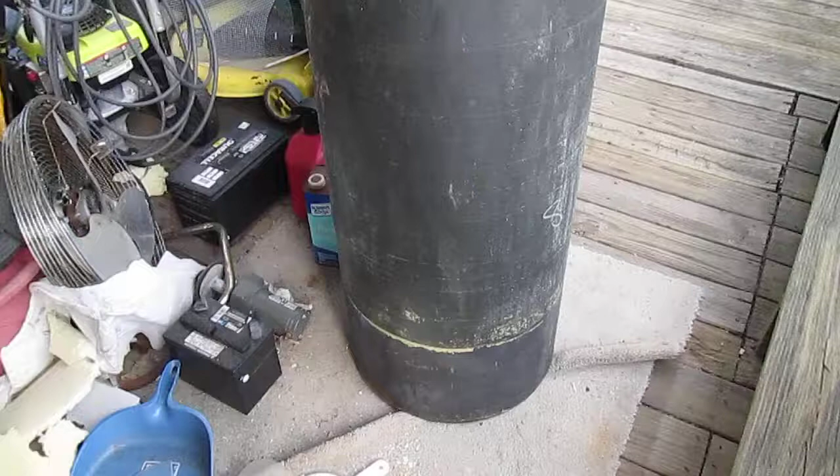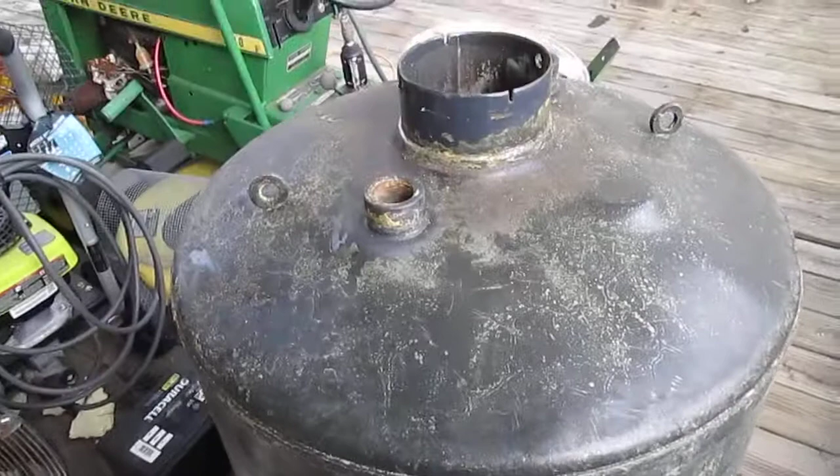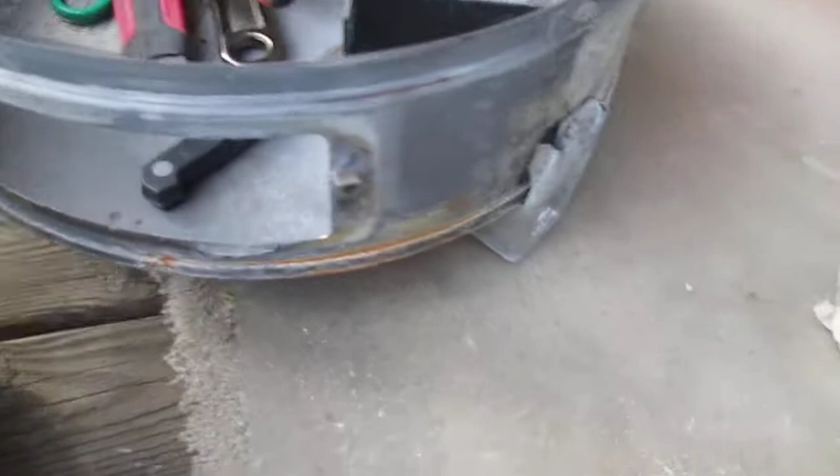Okay, today I am going to start attempting to make my own waste oil burner. I got this tank here and it's a 40-gallon. My only issue is that this stupid thing that goes the pipe all the way down, that's my only issue. Other than that, everything else looks really good. I also have the base here, which is awesome. It has 3 legs and it sits right on top of it, so I can raise that off the ground.

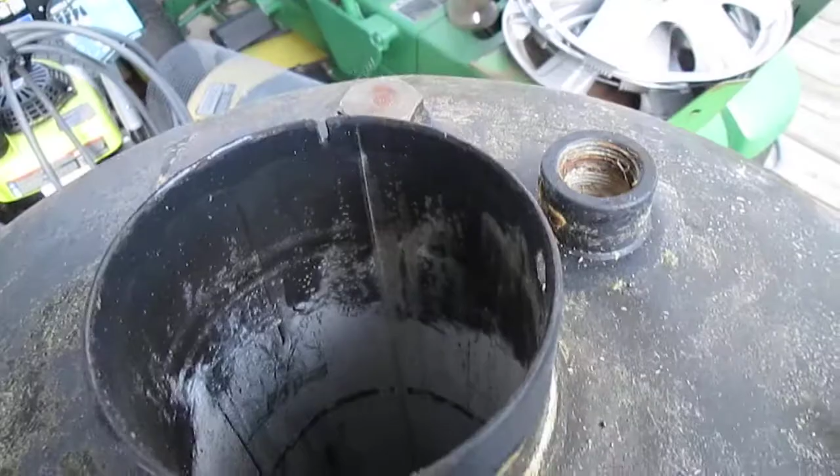I'm planning to put the door over here somewhere because that's where my feeding tube's gonna go in from the side, and then all these holes right here up here where the inlet and the outlet from the original, I have to plug that up. Same thing with the side here. I guess that's the plug that they use to plug in with, but other than that, there's nothing else on there at all. I'm going to show you the drawings.

I'm going to go inside a little bit because it's kind of windy out. And here's my drawing. Okay. Sorry, the camera's a little shaky, but this is just a start, and this is the plan.

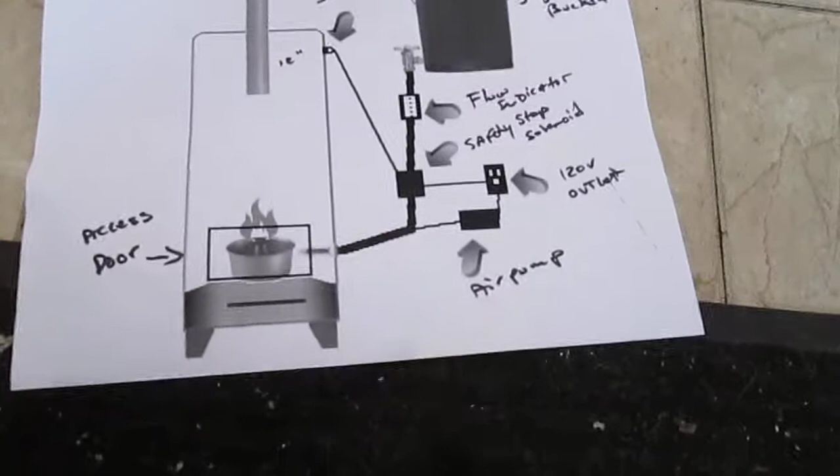That's my access door, and this isn't gonna... I'm gonna use an air pump instead. A lot of people use like hair dryers and blow dryers and things like that. I think I'm gonna use an air pump, a small silent air pump, and this is gonna go through here.

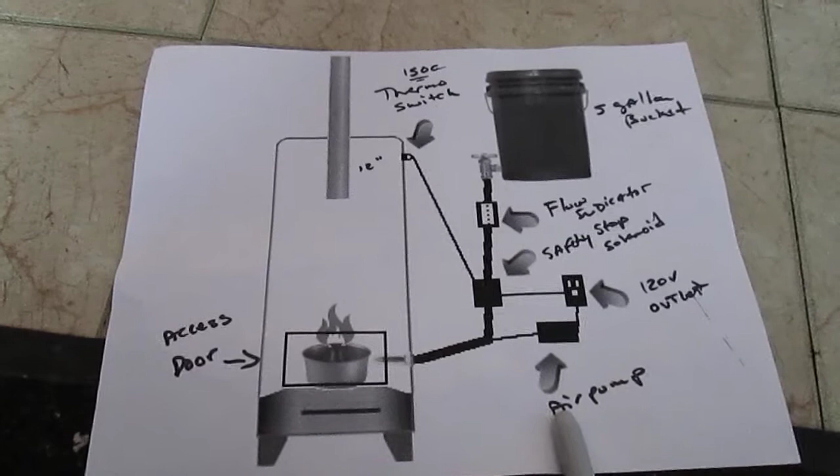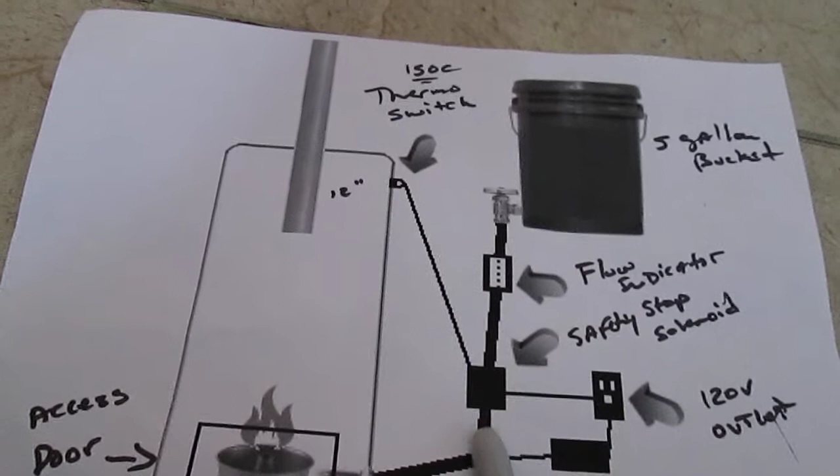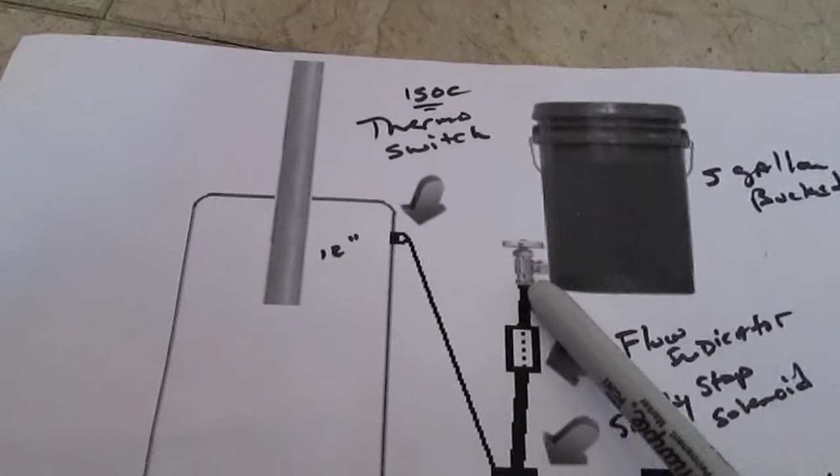This is my outlet to support that, and also too, there's gonna be a 12-volt solenoid as well here. This is actually a safety thing because from the bucket I'm gonna have just a switch. I'm gonna make this as simple as I can, an open valve, and it's gonna drip through here.

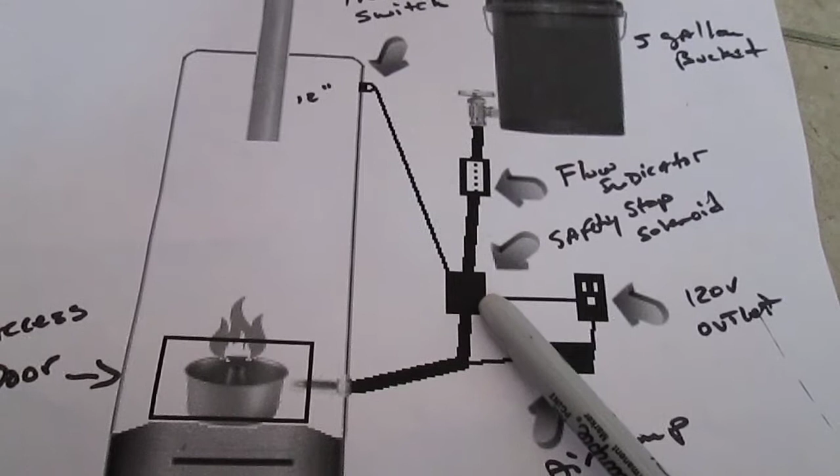The solenoid would be closed, and it's gonna detect the heat. So there's gonna be a snap disc right here. It detects the heat, and once the heat gets to a certain temperature, it's going to open this.

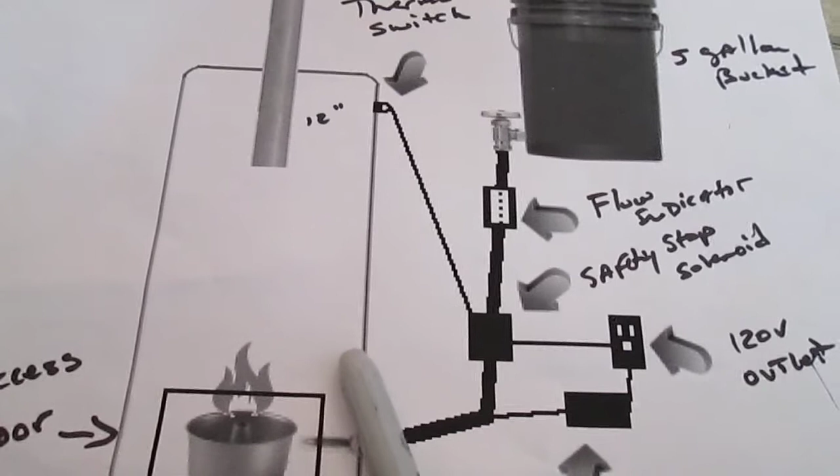So I'm going to make a little temperature gauge. I might put it over here instead because I need it to detect it really soon. There's an opening there. I might just use that to wire it to go through here instead of up here, because then I'll have wire hanging all over the place.

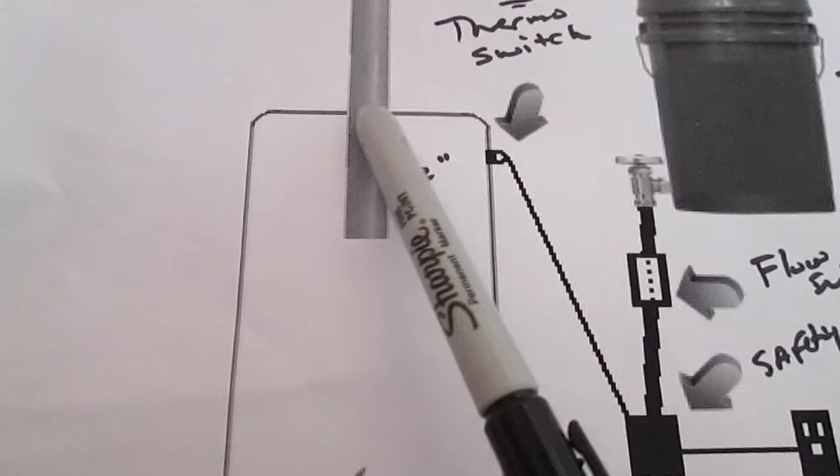Like I stated before, the stupid pipe here, which is going to be my chimney, that's the only thing I don't like, but it's actually a good thing because I don't have to weld anything. I just have to cut this, but reaching up there to cut that at about 12 inches down, it's going to be hard for me.

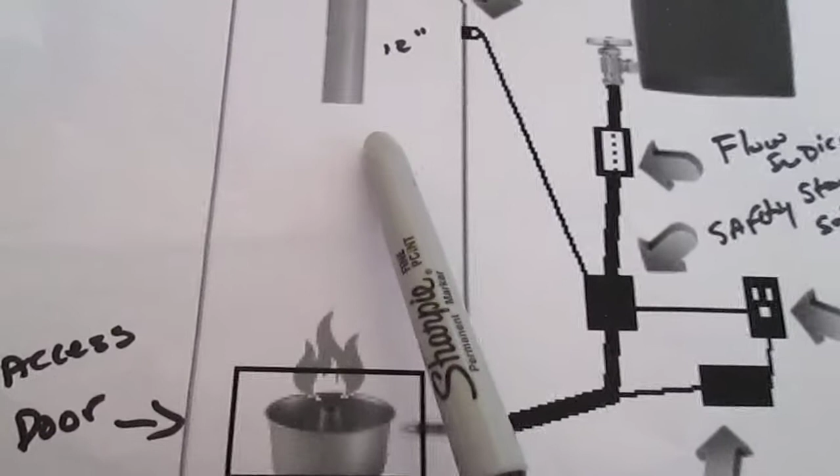I might move this door up a little bit so I can go up there with a saw and with a grinder and just grind the hell out of it and get that piece out. I don't care how it's going to look because it doesn't matter.

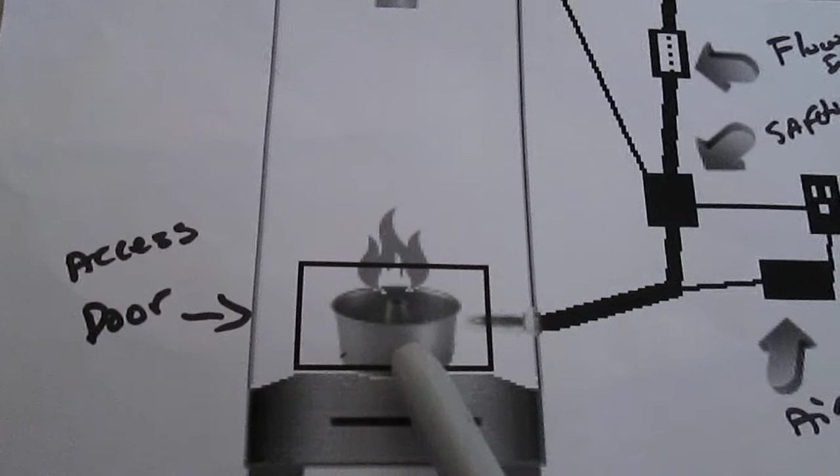I've seen the burning chamber with a lot of people, and I think the fluted pan that they make cakes out of, I think that would be my best thing, because a lot of people actually drip it from up here downward, which I did not like.

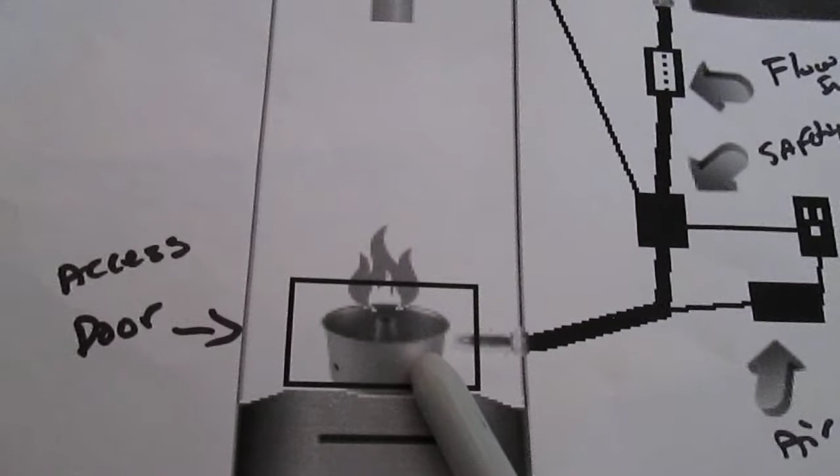So I'm gonna have mine going through from the side, and the plug is already here. There's a plug that opens, so I don't have to drill anything, and I'm just gonna feed it right through here, plus the air going through here, so everything will be sealed. I don't want anything to be leaking.

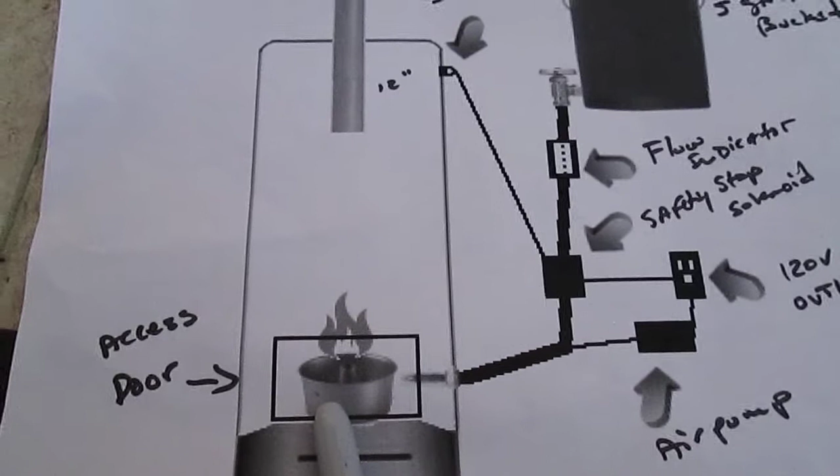Sealing would be my only thing, and this would be the only opening, the only access door, because I want to take this out so that I can clean it and then put a new one back. So I'm gonna have 2, so that way I can have a cleaning one, and then the other one's gonna be inside burning as it goes.

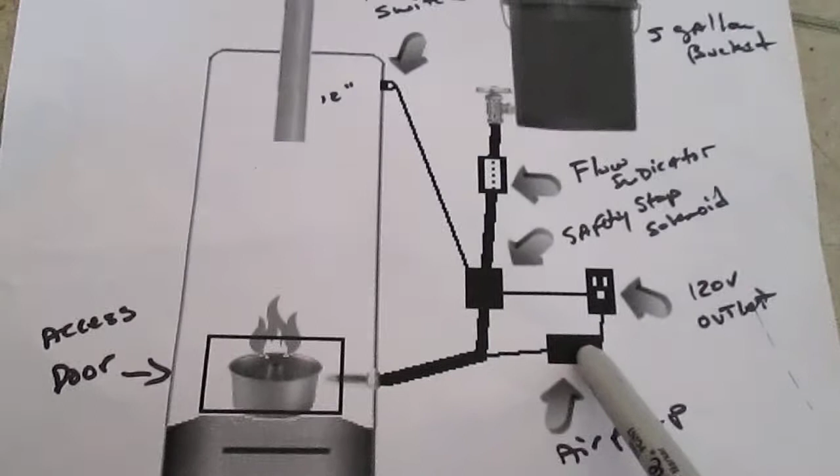But other than that, pretty simple. I'm gonna keep this as simple as I can, less stuff as I can. The only thing is my air pump, which is gonna use the fish tank air pump. I'm gonna try that first and see how that goes.

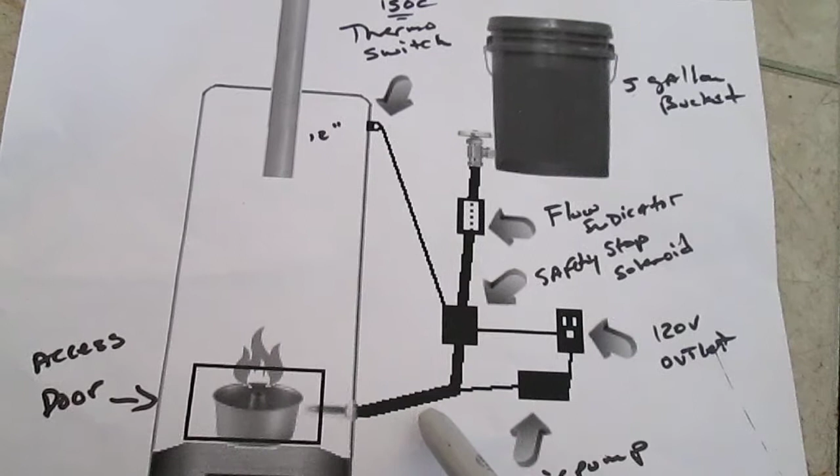If it's not enough, then I'll break this, and then I'm going to put another connection in and maybe a bigger flow. But I'm going to try a small air pump first, I believe it's 45 psi, I think, on those, which is pretty big. My air pump is pretty big, but that's what I'm going to do.

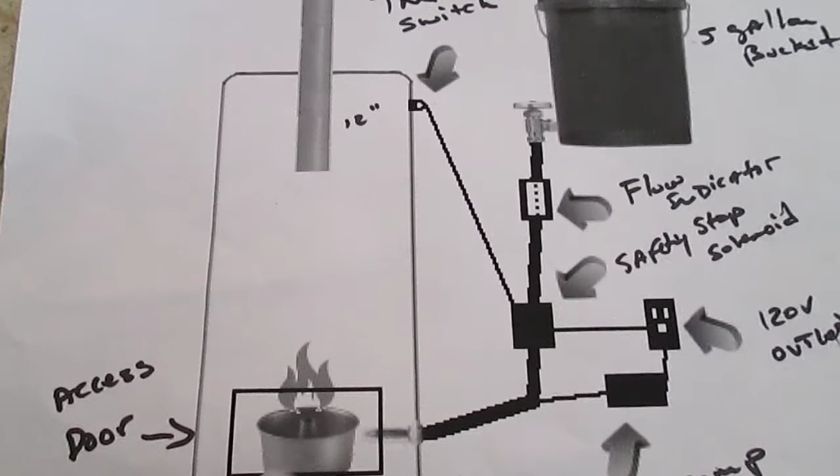My most feature is going to be a safety solenoid here. That's a safety stop for the solenoid if there's no fire, because this thing will always be on. That means it's always on.

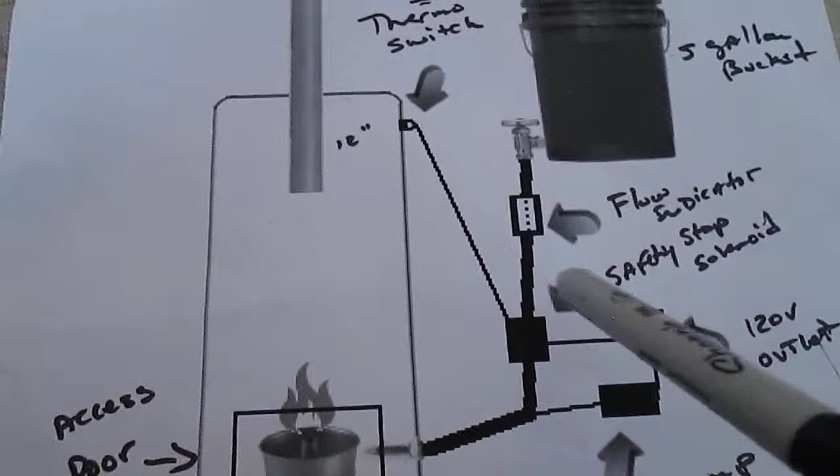Once I flip the switch, this will turn on. But if it gets too cold, like if it goes under 150 degrees Celsius, then this will automatically shut off. So it's going to go on and off, on and off.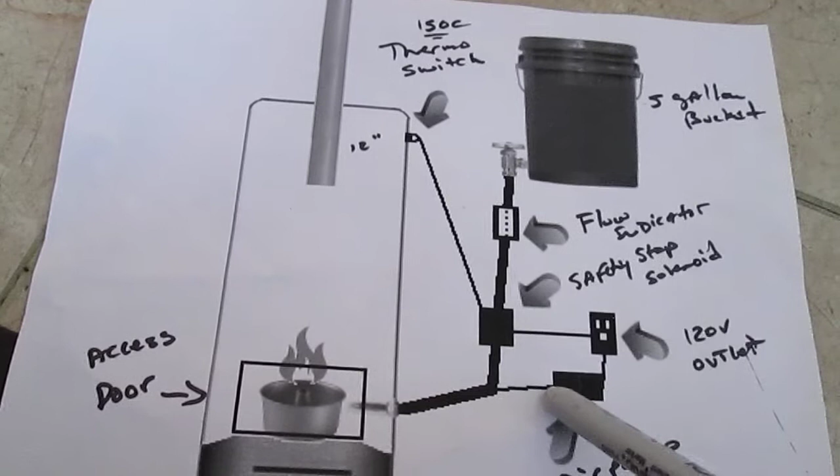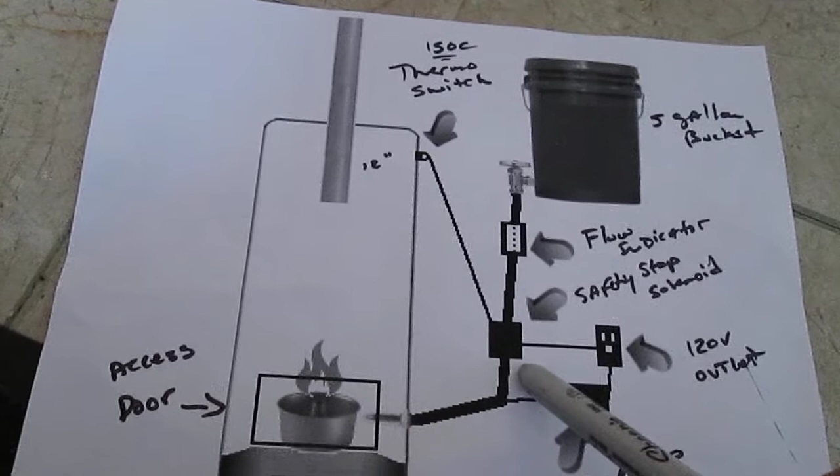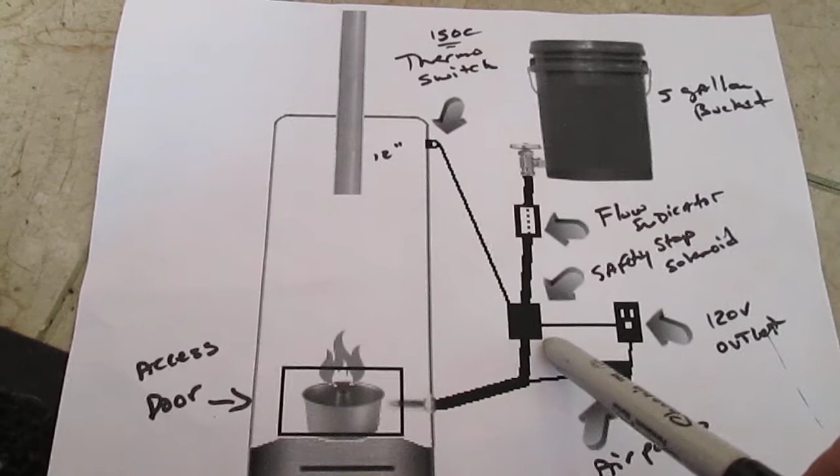My only issue is the fuel. So my safety measure is that's going to be a normally closed solenoid, done just for safety. That means if it doesn't detect heat, or rather if it detects heat too high, it's going to automatically shut off the thing here.

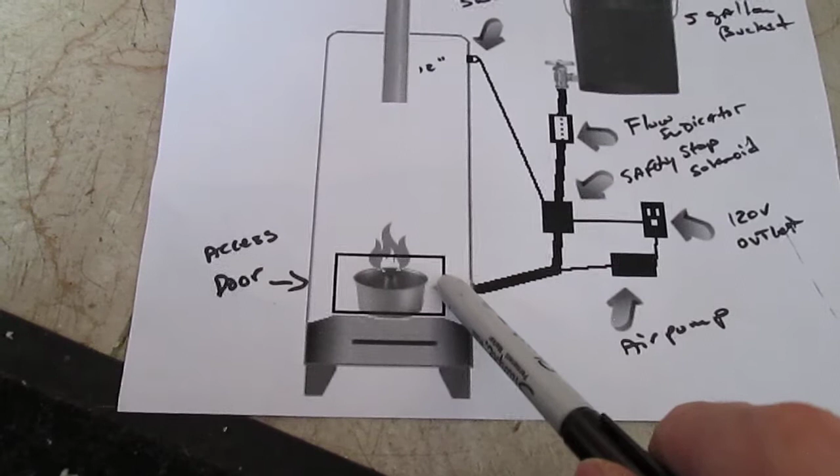My safety was my only concern on this build. Other than that, it's pretty much nice and simple. I'm also going to build something around here so I can put a gasket onto the door, so the door will be just big enough for me to get this out to clean. That's it, I'm not accessing anything else.

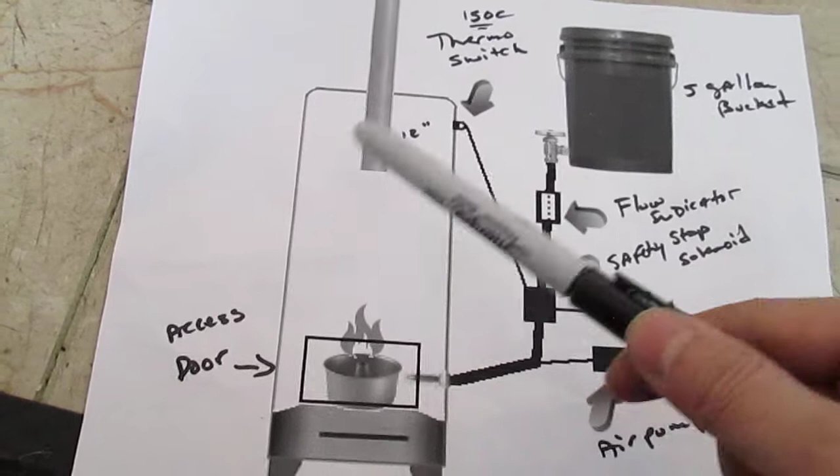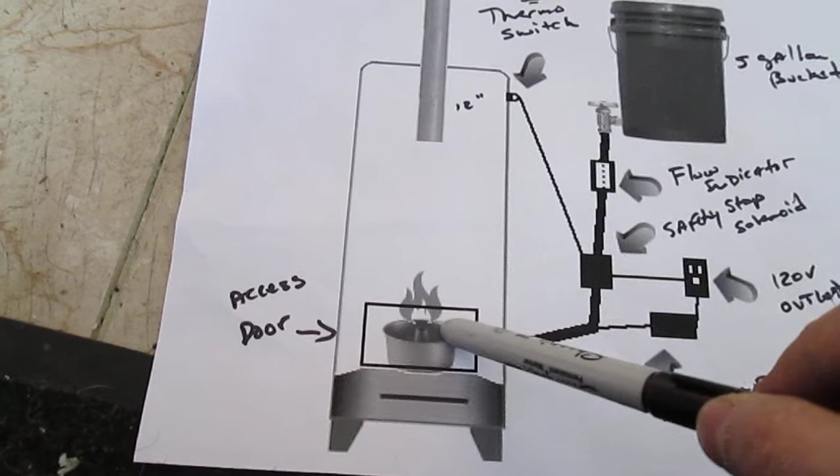I don't know how I'm going to route this pipe. The pipe continues all the way down through here because that's where the burning chamber used to be, and it heats that up, and then heats the pipe, and that's how the water got heated. I'm going to cut that out down to here and seal it, then put this burner, the fluted pan, cake pan, right on top of that, so everything is sealed. So in case something happens, all those things are sealed.

You can probably burn off straight from that too, but I want something to clean, so that's what I want to do. So that's where it's going to come in.

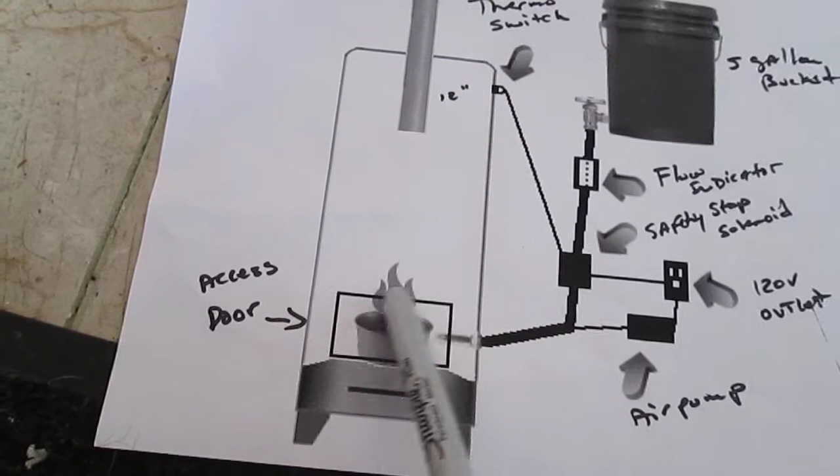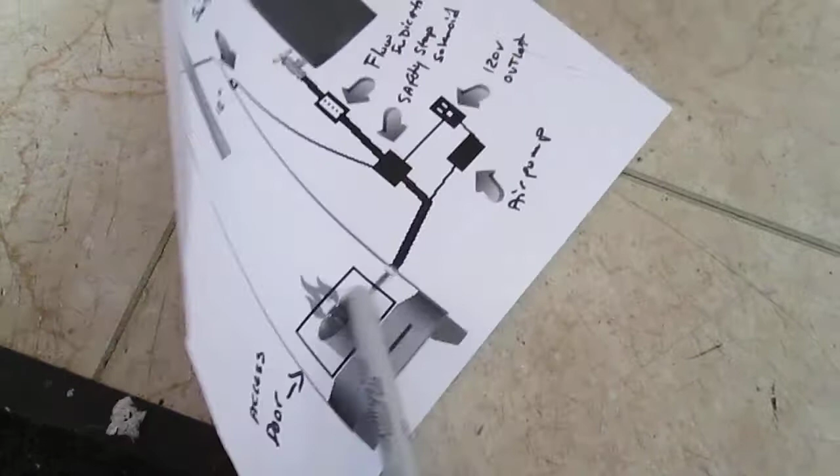I'm going to drill a hole through here and feed a tube through, so that way it'll be like a vortex of air circulating through before it actually burns. That way you can control it. Sorry, it's kind of windy today.

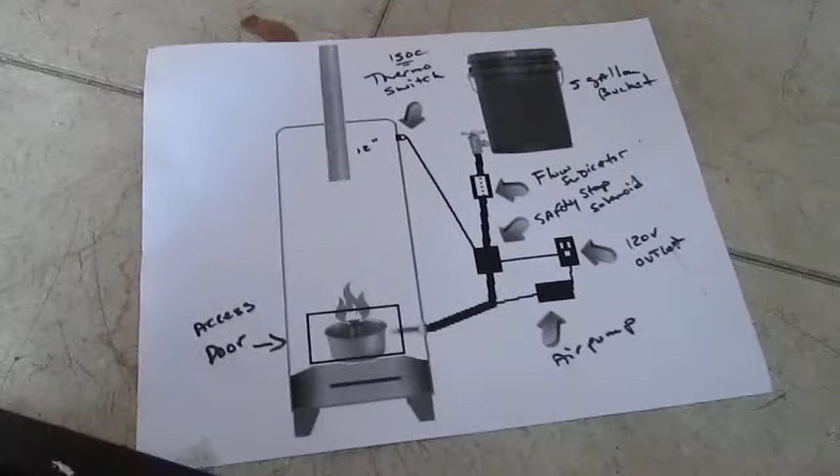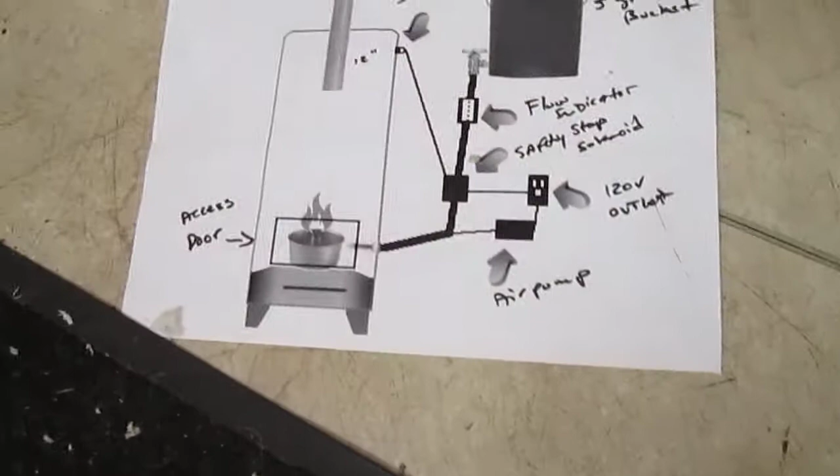I did this drawing by myself, on the computer. I just took a bunch of stuff and put it together and designed it. I know I'm pretty skillful, I can do a lot of things, just not skillful enough to keep all my money that I'm making. But anyway.

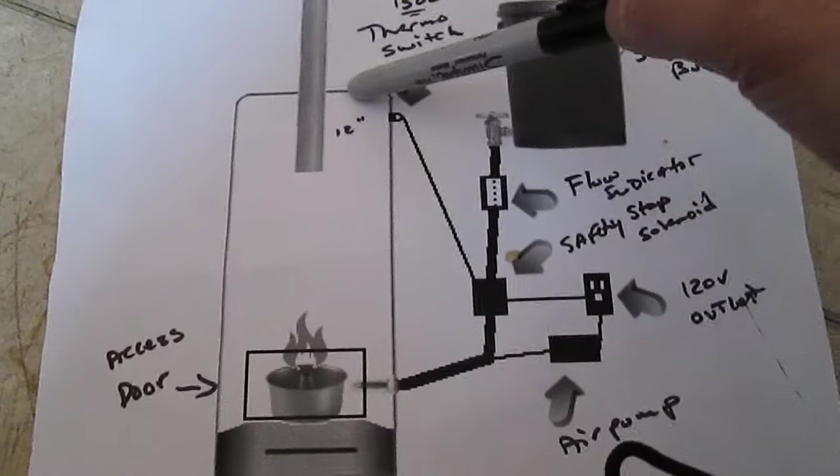This here is pretty simple. From here, there's that top that I showed you. It's pretty easy because I just connect, I believe, 3-inch pipes right through the chimney. So it goes all the way out to the chimney, and there's a heat conductor there, and I'm going to put a few fans, probably two behind here.

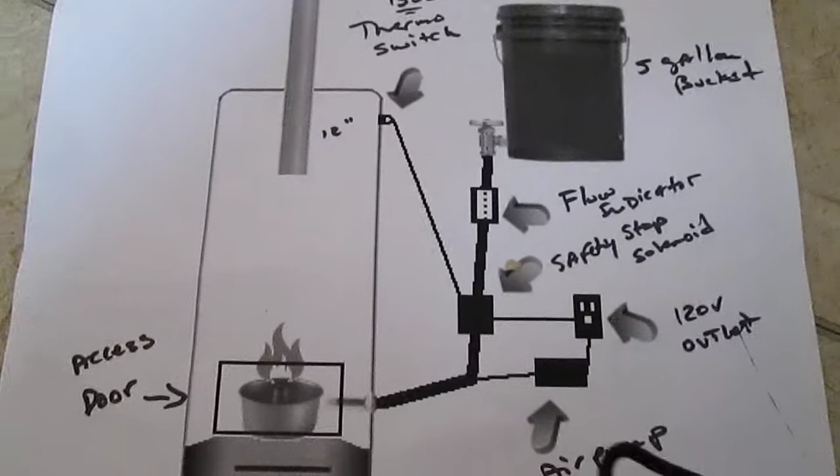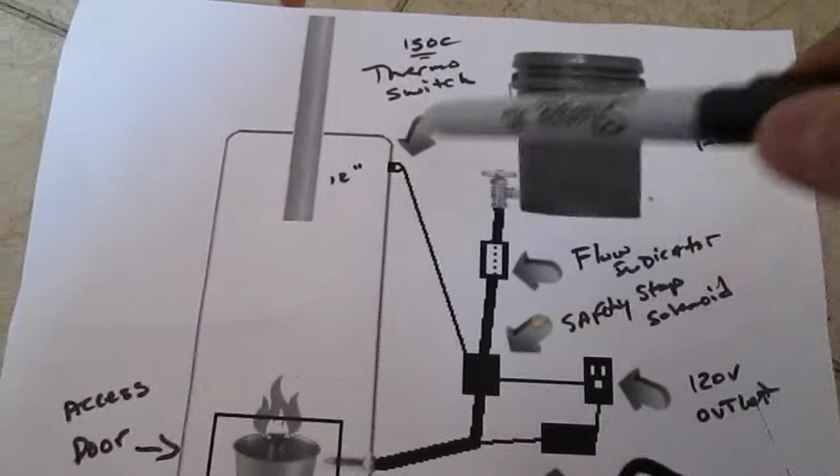So that way it'll get all the heat to blow around. They're also going to have a thermal disc as well, so that it turns on automatically once it reaches a certain temperature. But other than that, that's about it on this one.

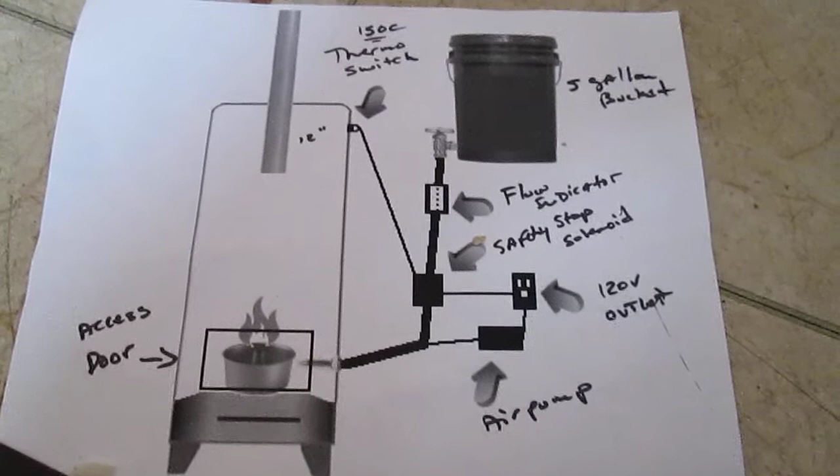This is just my plan, and I'm going to make it this week, so I'll upload the build next week. I don't know if I'm going to keep making videos of the build process, because this is pretty simple — I'm just going to cut a hole through here basically. The other hole's already pre-drilled from the heater, from the water heater concept itself, so I didn't have to do those.

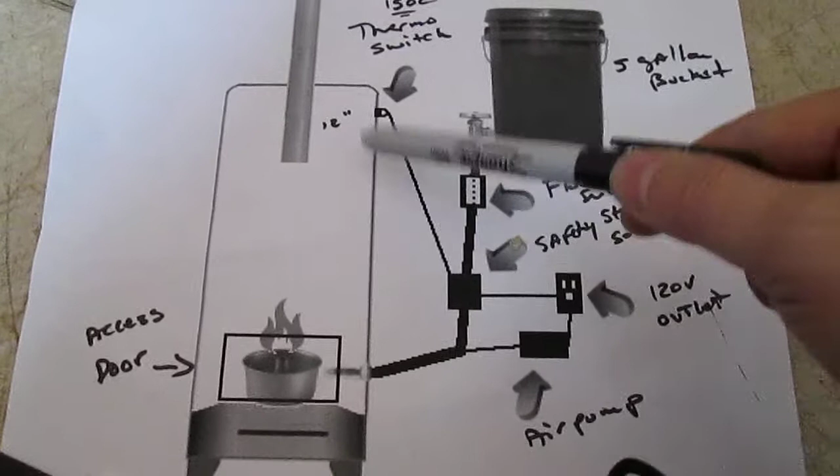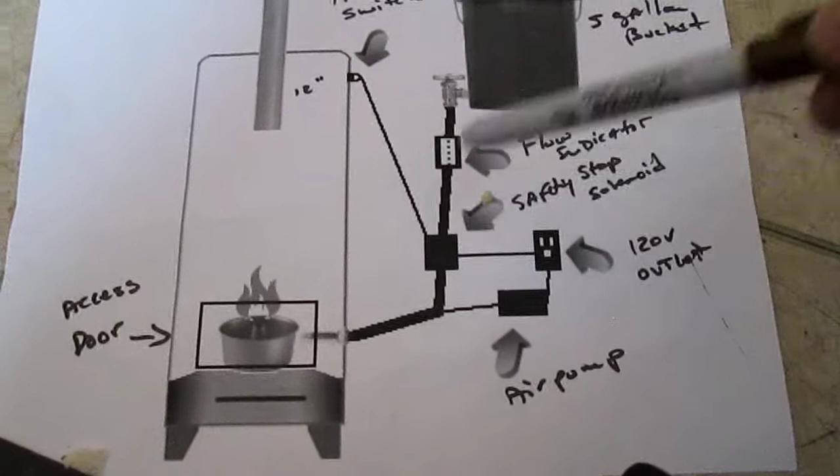The only thing I have to do is pipe this all the way up here, and then put a see-through thing so I can see my drip dripping through. From that, it's going to pipe into a solenoid, which is always off by default.

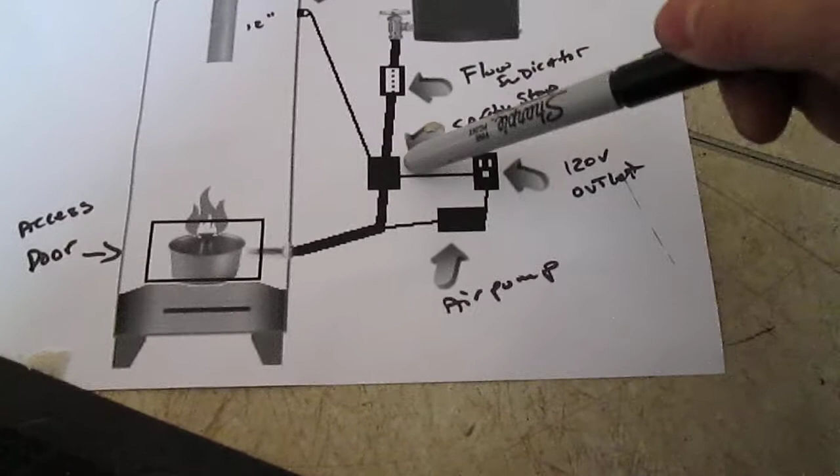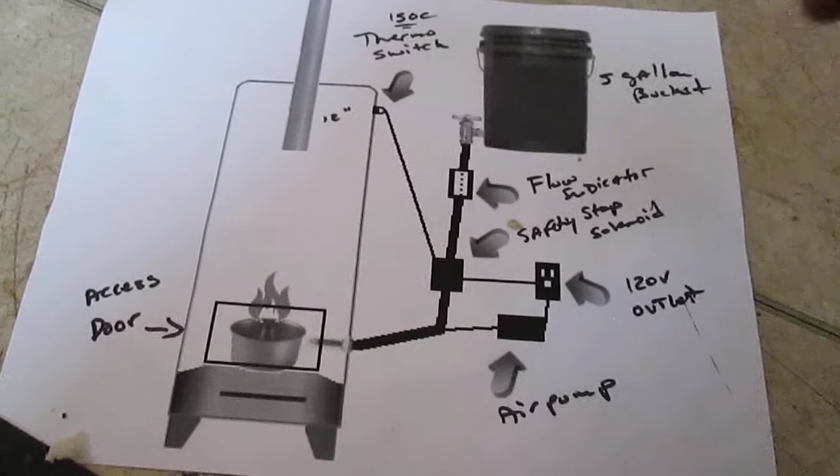Only when I turn on the switch will it turn on, but the switch is going to stop that, because the switch is going to be around here somewhere. The switch is going to stop this, it comes after this, because this switch is always on — it won't shut off until it reaches 150 Celsius, which is like 300 something degrees, I think.

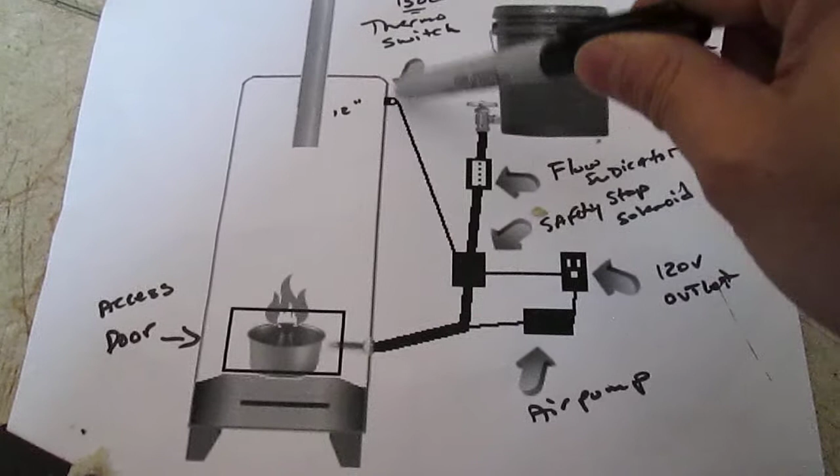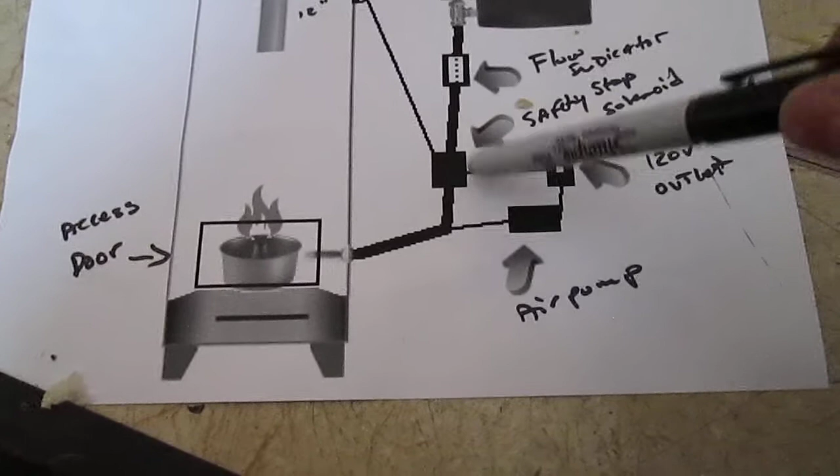This might be moving around a little bit because I wanted to experiment, but that's not the final location. It's probably going to be up here if it has to be, because like I said, it's dependent on the temperature. But that is my only main concern on this build, because safety has to go first, and everybody else thinks that's the way to go.